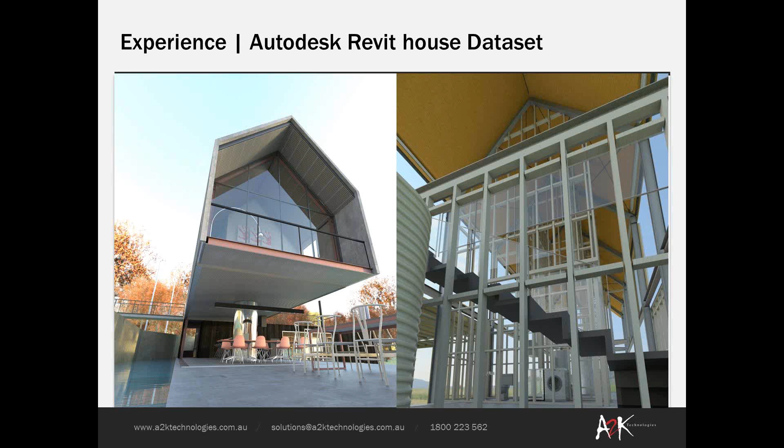Okay, I'm going to take us through the first couple of items on our agenda. We're going to look at Revit MEP, and then we'll have an overview of Navisworks and the ReCap tools in 2015. Let's get moving. New features in Revit MEP 2015.

Let's cover the main ones applicable to the MEP space specifically, beginning with pressure drop calculations, which have been improved and updated. They've added a couple of additional equations to calculate pressure drops in your ducts and pipes. Previously they had just one equation for turbulent flow.

They have now added the Haaland equation and the Colebrook equation, which are turbulent and transitional flow equations. So you have the opportunity to choose which equation, which calculation, you want to use, giving a bit more flexibility there. And as I mentioned, that's for both ducts and pipes.

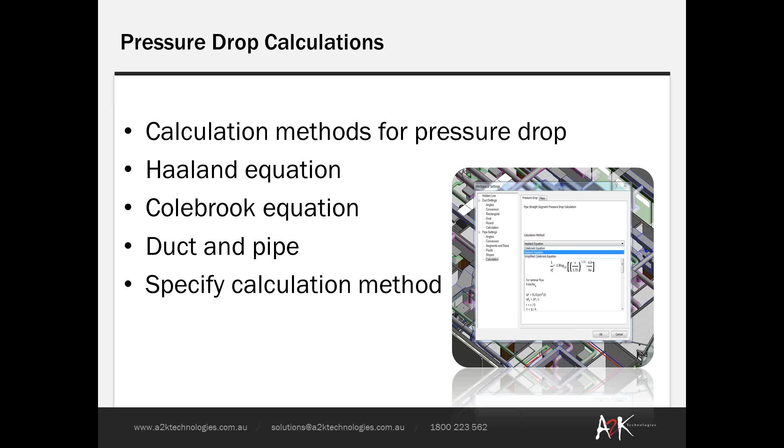The other major update in the mechanical space is the accurate display and documentation of airflows in your models — displaying accurate airflows before and after tapped ducts and pipes. Previously, prior to 2015, if you had pipes and ducts tapped off a main run, the tags would not show the airflow accurately in the system. But they've fixed that now so you can display those airflows accurately.

You could previously use the System Inspector tool, which would show you the airflows accurately in any branch of the duct or pipe. However, the tags themselves would only display the main flow, or wouldn't show a display of multiple values. So they've added that functionality so you've got more accuracy in tagging those features.

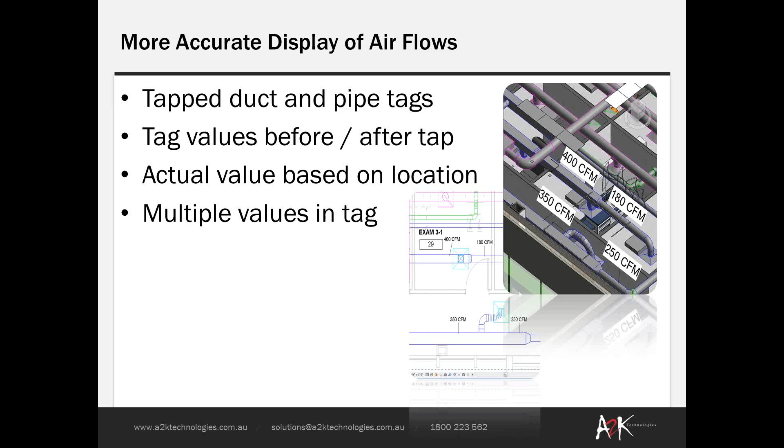On the API side of things, specific to MEP, they've opened up the API on the electrical side further now. So companies with the capability to tap into the API and do some programming now have more leeway on the electrical side of the API, specifically with wire shapes and being able to add and modify wire properties and remove vertices.

I guess it's encouraging to see them opening the API more and more, and specifically over the last few versions of Revit, they have been opening up the specific MEP disciplines, which has been quite encouraging.

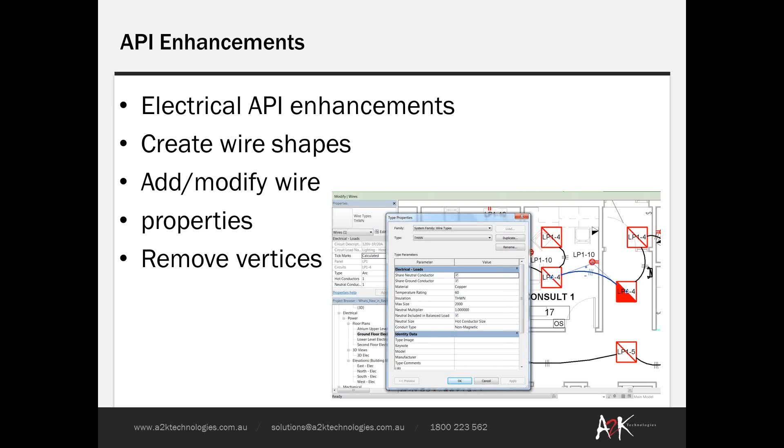Another new feature you'll experience in 2015 is how slope pipes work and connect. Previously there was a button that let you ignore the slope to connect, which could be a handy feature. They've updated that to add these new offset connection options — you can now choose whether to add a vertical step down when connecting a slope pipe into a main run, or use the equivalent of the old ignore-slope-to-connect button, now called the change slope button.

Some new features that are common across the Revit platform itself, I'll cover now. I think some of these are quite applicable to MEP and can be useful for documentation.

The first one is this new feature of being able to add images in schedules. They've added two parameters into Revit now: a type image parameter and an instance image parameter, which allow you to attach an image — a JPEG or bitmap file — to your family components. Then when you schedule those, when you create a schedule for a particular category in Revit, you'll have access to those parameters.

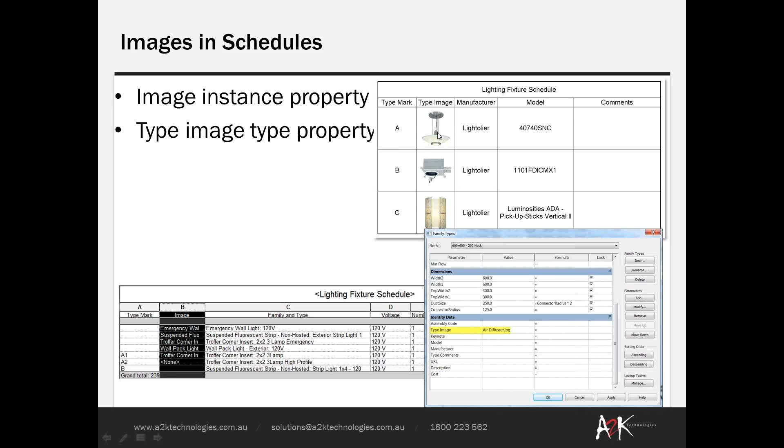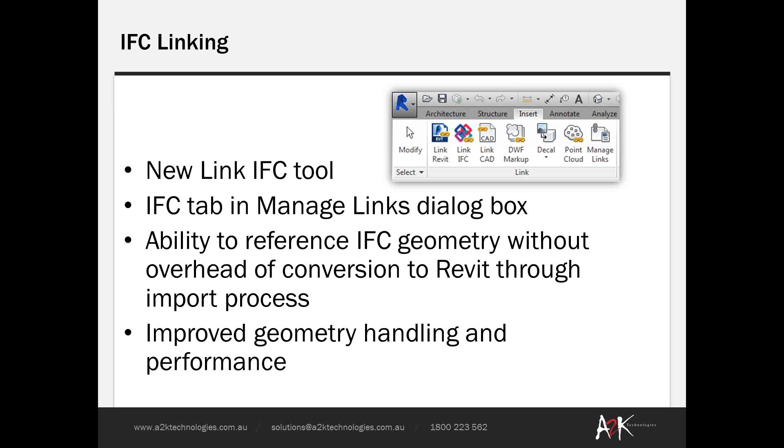Another new feature is the ability to link IFC files in. Previously, we could only import into Revit, which was a lengthy process and could come up with errors - I'm sure some of you have experienced it. Now you have the option to link IFC files in, much like linking any other Revit model, without the overhead of converting to native Revit geometry format. You'll have access to the IFC link tab in Manage Links, so you can control those links much like your Revit links - basically improved geometry handling for projects where you're working across different companies using different software.

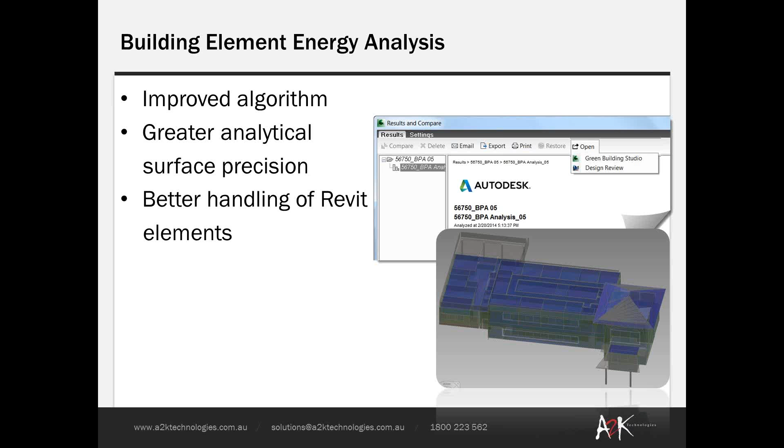On the building element energy analysis side, they've improved some of the algorithms Revit uses in the background to communicate with tools like Green Building Studio. There's greater analytical surface precision and better handling of these elements in Revit, giving you more accurate results when running things like energy analysis.

There are also improvements in overall performance and the back end of the program itself. I'll breeze through this since Samuel will touch on it in more detail when covering the architectural parts. Basically, there are faster drawing elements in views and faster selection graphics - the drawing calls Revit asks for when drawing components are reduced. Specific to MEP, they've enhanced the underlying way MEP components render on the fly, particularly in 3D views, so overall the program performs faster.

Okay, so let's now jump in and have a quick look at some features of Navisworks, and how you can use it for coordination and clash detection.

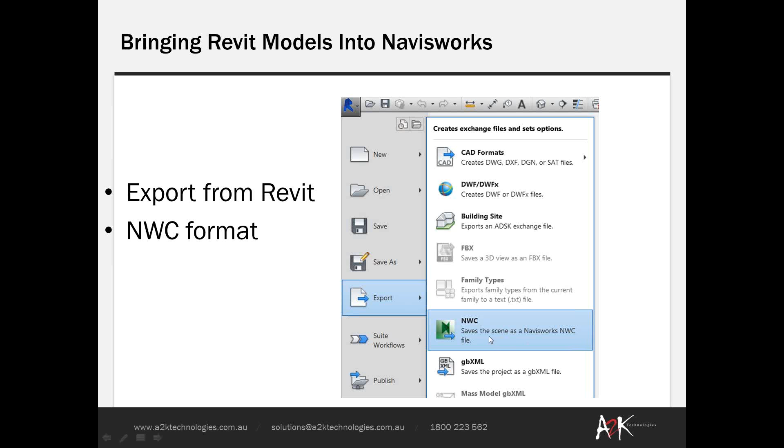In Navisworks, you can bring in models from multiple formats, one of them being Revit. In this first slide, I'm talking about exporting from Revit to the NWC format. It's important to note that Navisworks 2015 will read native Revit RVT files directly. However, in the next few slides I'll explain briefly why we think it's still useful, and the workflows are a bit better, if you export from Revit to the NWC format.

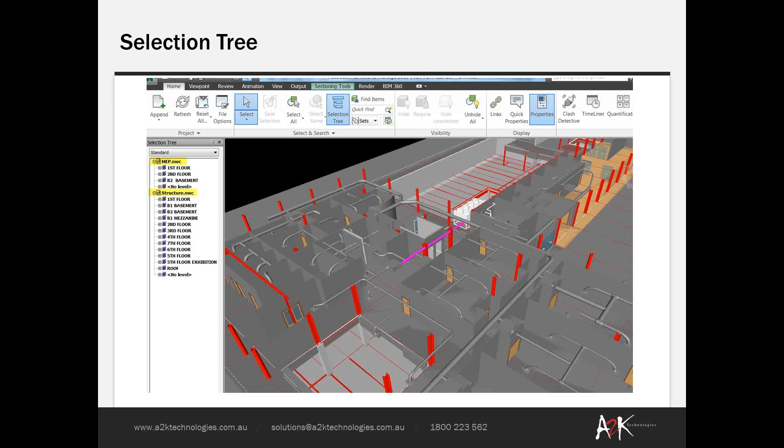When you append NWC files into your Navisworks file, once exported from your Revit model, they come in and you can see what's called the selection tree. Over here on the left-hand side, it breaks up the different models I've brought in - we've got an MEP and a structure NWC model. By exporting to the NWC format, you get a lot more flexibility and control through your selection tree and how you can drill into the different layers of geometry. It's also a much quicker file format to work with in Navisworks, and easier to manage, particularly if you've got a large data set.

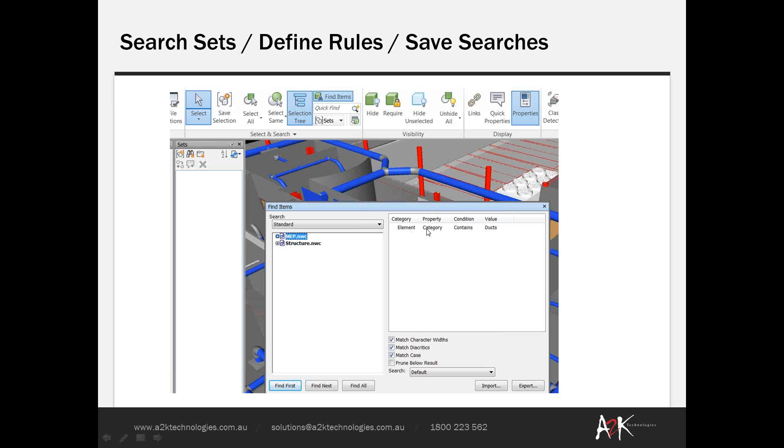Once I have set that search tool, I can actually save that search set so that I can use it later on, and I don't have to come back and run this search rule each and every time. I can save the search set, and if I go to the next screen, you can see that I've now saved that set and called it ducts.

So I can come back and call on that search set, and it'll select the ducts each and every time. The beauty of search sets is that even when you update your model, if ducts have been added or you add another level, this search set will continually update and keep finding all of those ducts in your model. So it's current and accurate, running that search pretty much every time you select that search set, getting every piece in the model.

So just a little bit about now the clash detective tool. This is in Navisworks Manage 2015.

Carrying on from those search sets, we can actually run these clash detection tools between particular elements in our Navisworks data set. In this example, as we saw with the MEP model and the structure model, I can set myself up a new clash test from the clash detective tool. I can call it, for example, duct versus steel, and then for my selection criteria, instead of just picking the model itself, I can drill into those search sets I've defined. So I've drilled into that duct search set I created, and I'll have that selected as my selection A column for my clash rule.

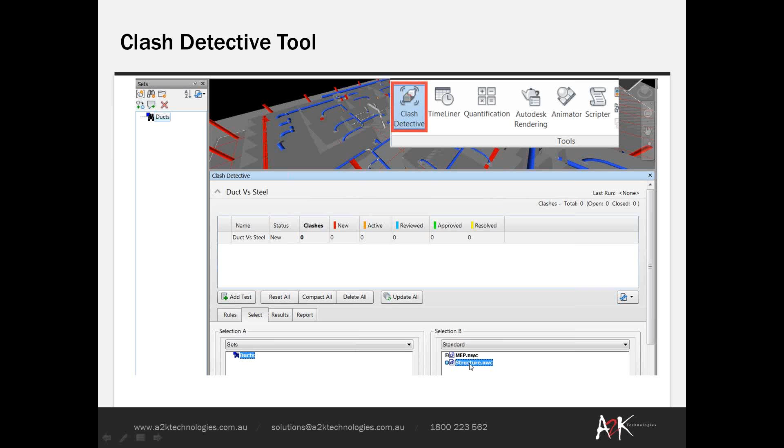And I want to clash that against, here on the right-hand side of my screen, against the structure. Once I've defined the selection criteria for my clash, we're now free to run the test, so we can click on the Run Test button.

Once we've run the test, we can see that we have a whole bunch of clashes that it's found, 25 clashes in this example, and we can run through those clashes, and Navisworks will highlight the elements applicable to each clash. This one here is labelled as just clash 14 at the moment. I have that selected, and you can see that it's highlighting that on the screen, giving us a preview.

You can alter and change the way these are visibly showing up in this clash detection tool, whether it's greying out the rest of the model, the background, other elements, and just highlighting what's clashing between your selection A and selection B columns, highlighting those green and red. So you do have some flexibility to change those visibilities.

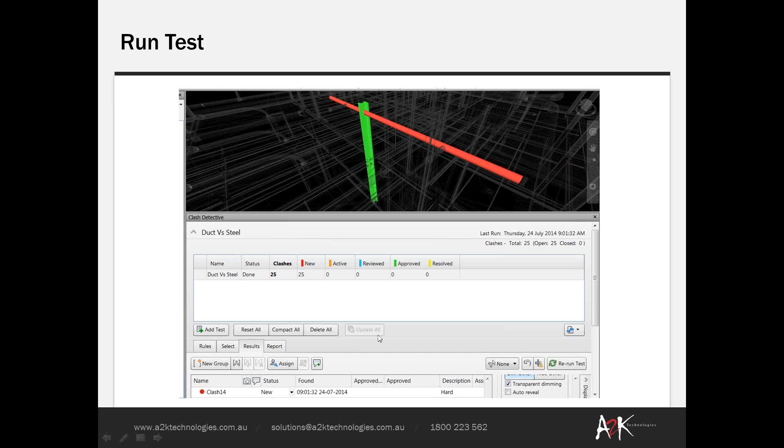On top of that, with your clash management, you can see that you've got options to assign your clashes to whether they're new, active, reviewed, or approved, and you can do that down here in the clash results portion of the clash detection tool. So we can assign those rules and assignments there.

Another nice feature of Navisworks is this switchback feature. We'll just touch on this quickly. What this allows you to do is select a piece of geometry or an element in Navisworks, and then you...

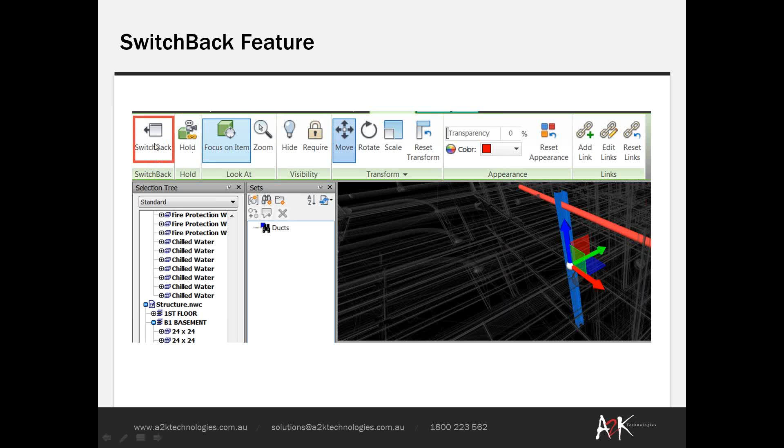click on the switchback button here, and this allows you, if you've got the same model that you've opened in Revit that you've exported into your Navisworks file, to click on your switchback button in Navisworks and it'll take you back to the authoring software, which in this case would be Revit. It will take you to a view and take you to that element in the view. So there's a bit of setup to get that working, but it does work quite well once you get it going, so it can be quite handy to take you back to the Revit model as need be.

You can report these clashes out of Navisworks. There's a few formats you can take out, HTML, XML as an example, and you've got a few options for what you actually want to export out, the summary, clash point, date found, etc., and which status of clashes you want to add in there: new, active, reviewed, or approved.

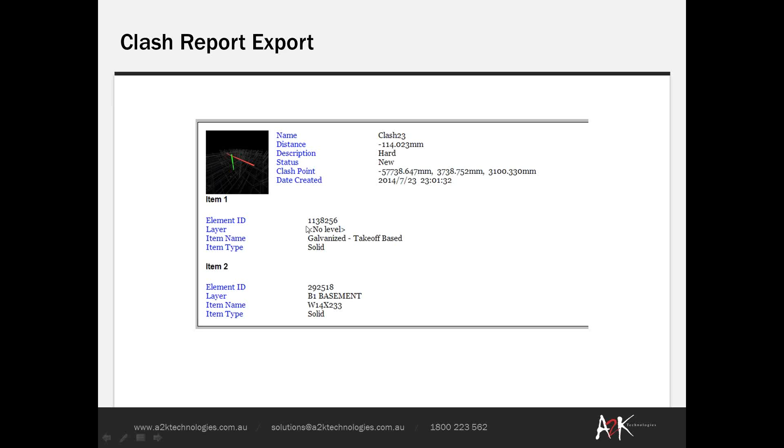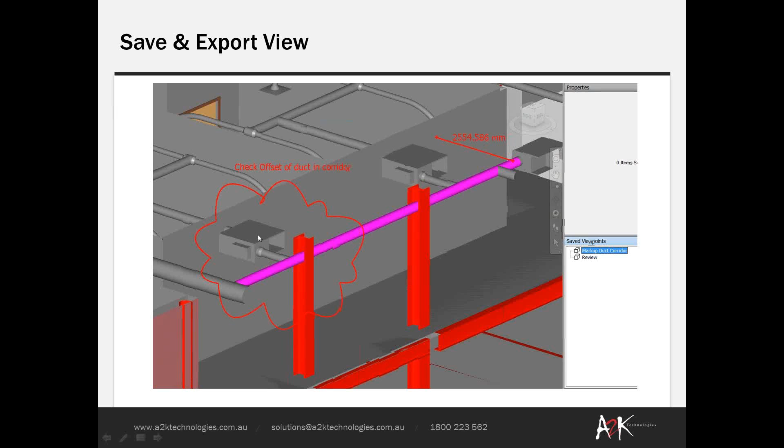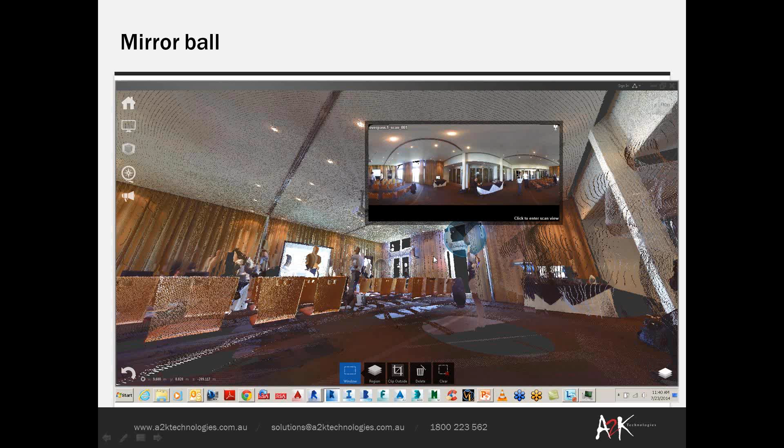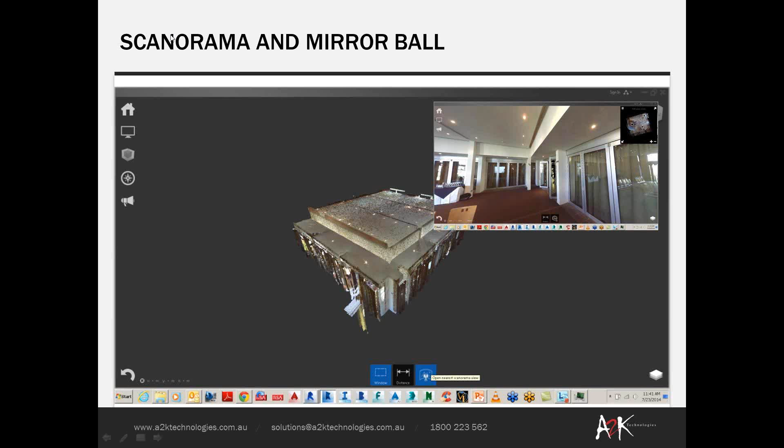The mirror ball feature in ReCap is enabled inside the scan, attached to the points within it. On the next screen, the Scanorama and mirror ball feature lets you click in and get a Scanorama effect, basically letting you navigate around your point cloud file.

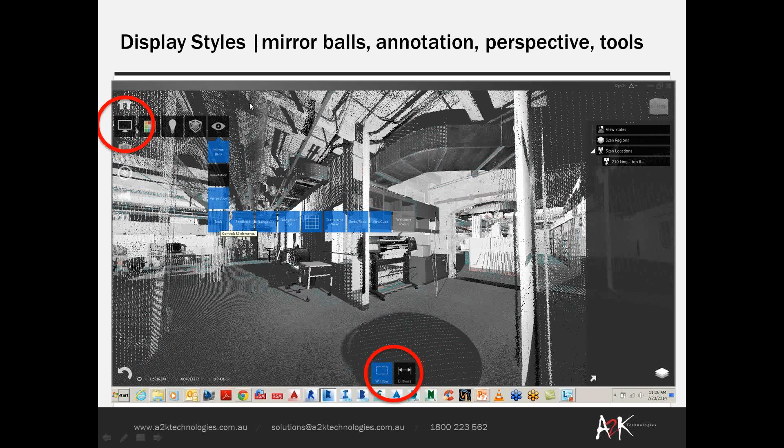So the imported scan result is basically what we're looking at here, this is what it looks like. Some other features include display styles with the mirror ball annotation and perspective tools. It's a really user-friendly interface, the buttons are quite accessible, and you've also got display options and options for distance as well.

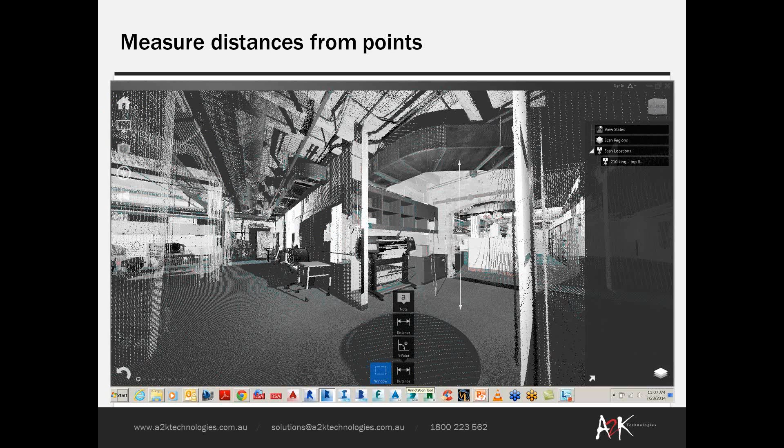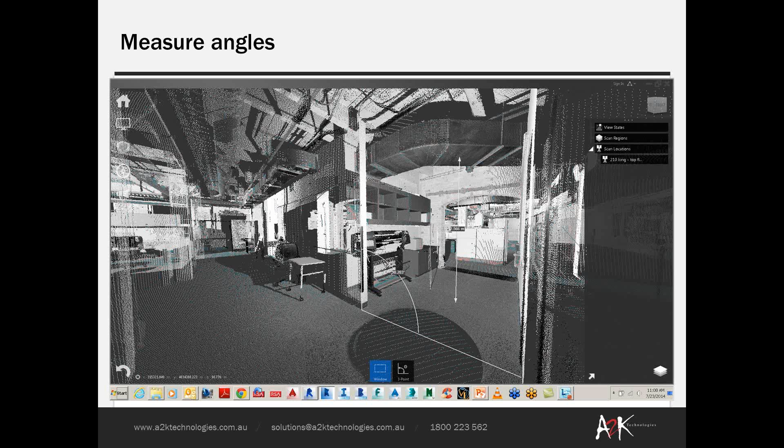Let's have a look at the next slide. Much like in Navisworks, we can measure and take distances off the point cloud file in ReCap, and there are a few other tools in there as well, we can also measure angles. The measurement tools work much the same as they feel in Navisworks, if you're used to that.

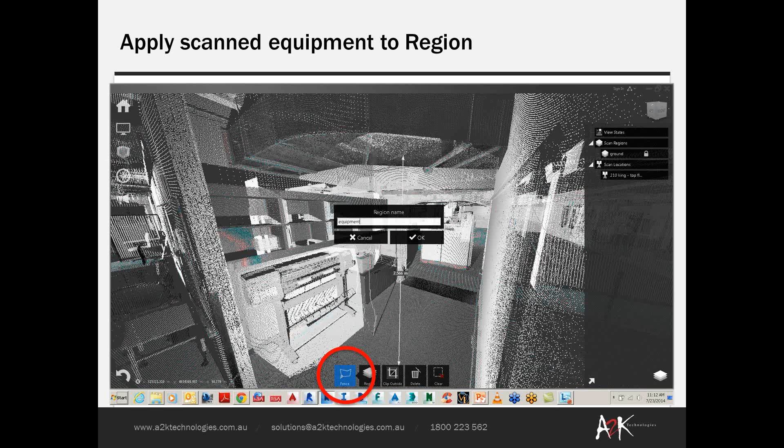On the next slide we can see an example of how we can apply regions, then create those regions to select and fence off certain geometry or points in the file. As an example, we've got some equipment being cut out, and you can see that you can actually remove elements of your point cloud file.

There's a limit box and a clip scan option in ReCap as well, which works much the same as a section box would in Revit, Navisworks, or other programs. You can crop and manipulate your point cloud file, as you can see on screen, and those clip and limit box features are available at the bottom of your screen.

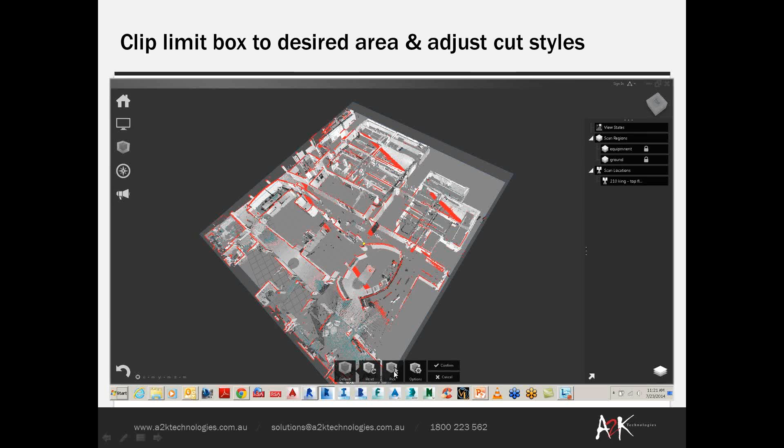Saving the file out of ReCap, the RCP is the ReCap file format. You can save out and use it in Revit, Navisworks, AutoCAD, and 3ds Max. Specifically, you can import your ReCap RCP files into Revit. As an example, you can link your point cloud files in and it will come through into your Revit file.

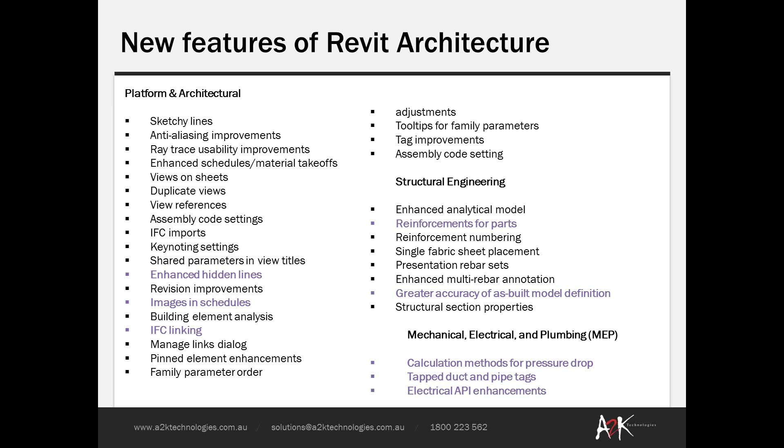So a bit of background, Revit has been around for a long time. Back in 1999, the vision for Revit was only ever thought of as being something for doing, say, a 5-story hospital. Then in 2002, Autodesk acquired the Revit technologies, and still the methodology was one person, one computer, and a $50 million building.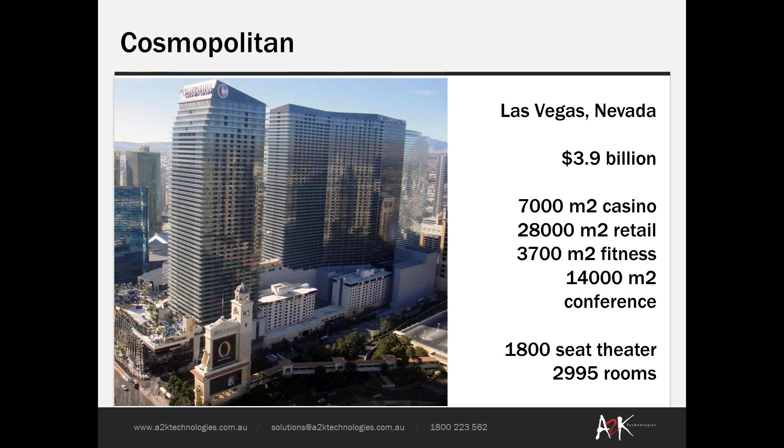Not everybody's going to need a fix for Russian translations and Navisworks quantification, so you can choose to ignore them, or you can install them as per what's needed for your project.

Let's start off with some of the tools for architects. One thing Brendan mentioned before is the new Revit 2015 platform is a lot faster - faster drawing of elements in views, faster selection graphics, and improved performance for MEP views. Our users compared 2014 to 2015 by running an API test for the demo dataset that ships with Revit. Opening up all the views of the model in 2014 took 45 seconds, whereas the same test in 2015 took 36 seconds - almost a 25% improvement when you migrate to 2015.

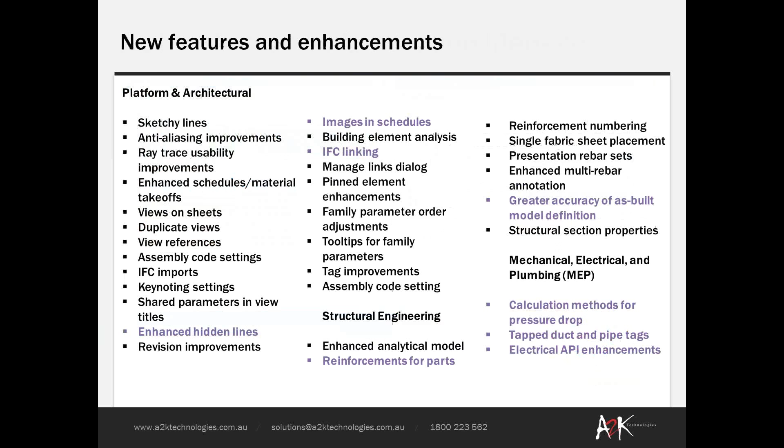A couple of other new tools for graphics is sketchy lines. Sometimes when presenting drawings to clients, we want to give it more of an artistic, sketchy look. You can go to the graphic display options in Revit 2015 and turn on Enable Sketchy Lines, then play around with the jitter and extension of those lines to get the graphical representation you want.

We also have platform enhancements with enhanced hidden lines. So if I'm working on a project with Brendan and want to see the mechanical or plumbing components transferring through my property, I can turn on these hidden lines and have greater control of them being displayed automatically to create more accurate and readable documentation.

Also, images in schedules are a really powerful application. Brendan mentioned this for electrical engineers doing lighting schedules - we can do this in the architectural space with furniture schedules too. We can bring in an image, whether a photograph, a rendering, or a screenshot of that family, place that parameter within your schedules, and bring out that information in the schedule table.

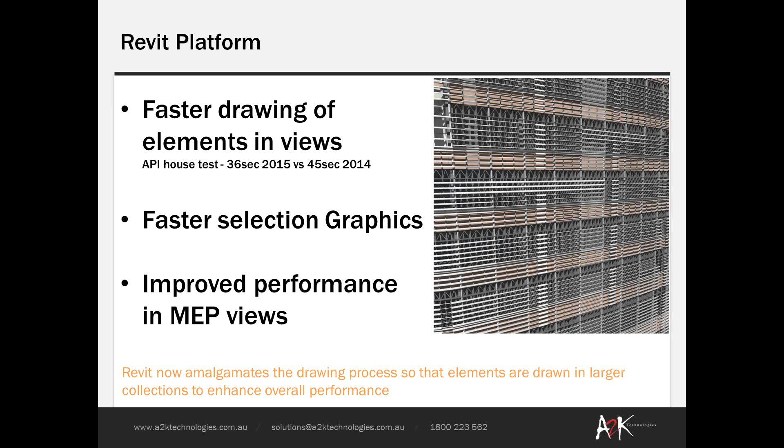One thing to note is that you need to place the schedule table on the sheet file for the graphical images to appear. So when you test this and you've got it within your model space, make sure you bring it into a sheet file, and then you'll be able to see those images that you've scheduled out.

Another great workflow to reduce the processing power on your computer is the IFC linking tool. I tested this with a dataset from bimobject - a heavy IFC file for another house with a lot of scaffolding. When we bring in this information via a linked IFC, it's a lot lighter, and I can select individual components within that linked IFC and bring up the embedded data in my properties palette on the left.

I want to mention the API. A lot's been going on with the application program interface since it started in 2005. We're using the API to develop Autodesk features like eTransmit, the new IFC link, and the family browser. So there's been a lot of growth with the API in the last 9 years.

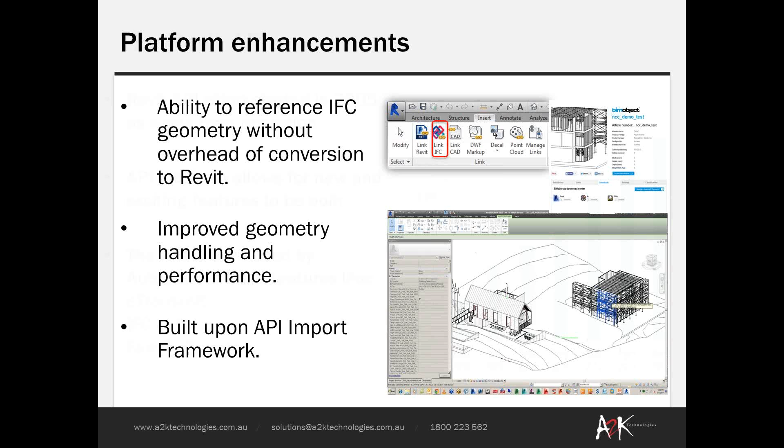Another great thing with the API, if you're on the full version of Revit, you can get access to all these different tools available on the Autodesk Revit Exchange Store. In the top right-hand corner of the majority of the applications is a little blue and white X, and that means the Exchange apps. You can click on that, and it will bring up all these different apps. A majority of them are free, or you can get them on a trial period, or for a small amount you can pay and download these apps to enhance your workflows.

This is just a screenshot of the page, so it will have a number of featured apps. There's bonus tools from Kiwi Codes, there's the level generator tool. A lot of these you see are free, or perhaps for tools like Power Measure, you may only pay $15 US. So you can get all these great apps to help you with your workflows, take out some of the repetitive workflows, and speed up production of your drawings.

One of the ones that I really like is the Casework and Interior Joinery tool. This will go through and make all the detail components and allow you to flex them with the design of your geometry and your system families in your model. So please go check this out.

You also get free ones with your subscription. Every year, if you're on subscription, you pay your annual subscription and you get your software upgrade. But you can also go to the subscription center and get extensions and apps as part of that payment to enhance your workflows. One of the ones you can see down the bottom right for MEP users is a space naming utility. You can download that extension, and it's all part of the subscription payment you make every year, so please go check that out.

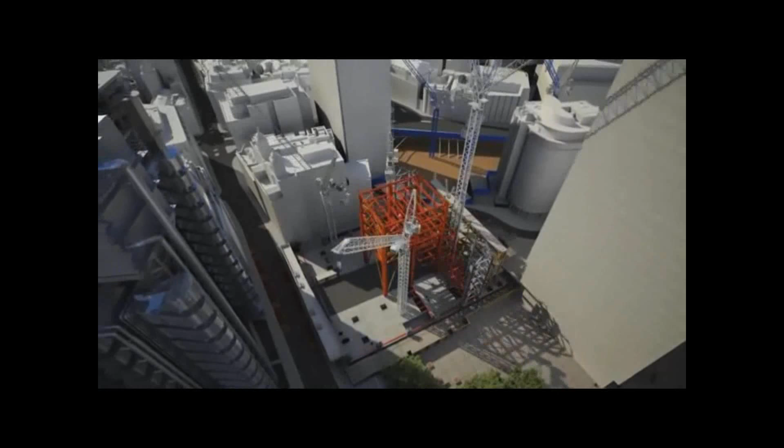What we're starting to see in Max is more and more people doing animations, and in the construction sector people want to produce construction animations. I want to try and play one now, which was produced by Laing O'Rourke. There is a slight bit of lag here because we're pushing it through Citrix, but this is a construction animation where Laing O'Rourke used the animation tools to produce a compelling sequence of installation and building components to win the bid to do the Leadenhall building in London.

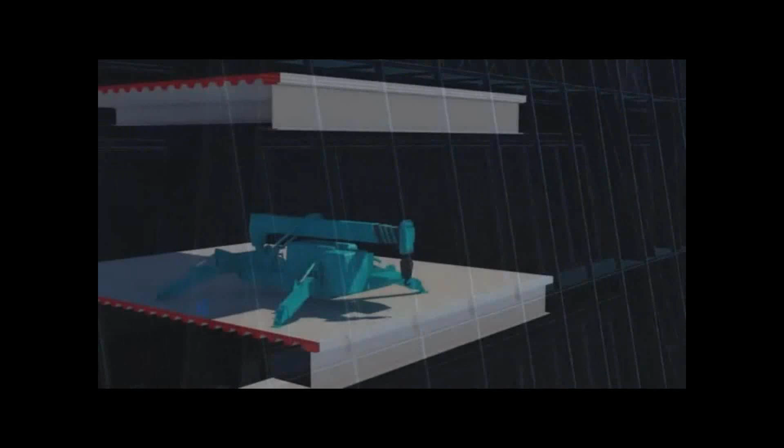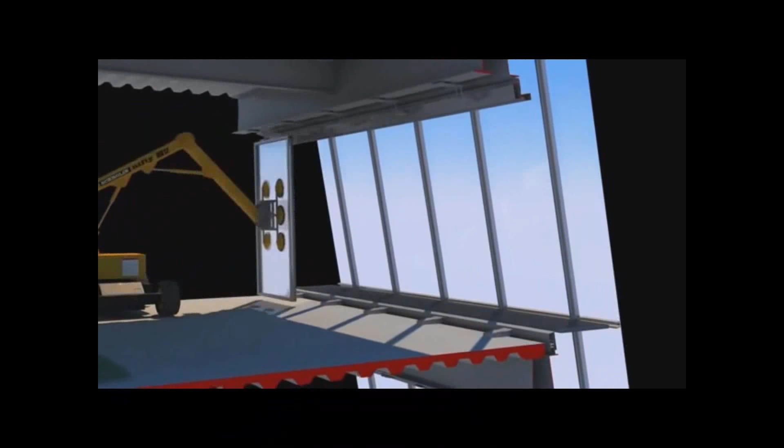If you haven't seen this project, it's a fantastic design, being dubbed the cheese grater. What they've done with this is get buy-in from the owners that they can build this building on budget and on time, knowing every single detail of every single component that's been installed, like the curtain walling and the double-skin facade. All of this has been worked out so that it will be built within its 36-month time period to complete, and that when the tenants take ownership of that building, they'll be able to move in on the right dates without delay. So it's a fantastic tool to communicate not just visualizations, but construction sequencing to a wide group of community stakeholders.

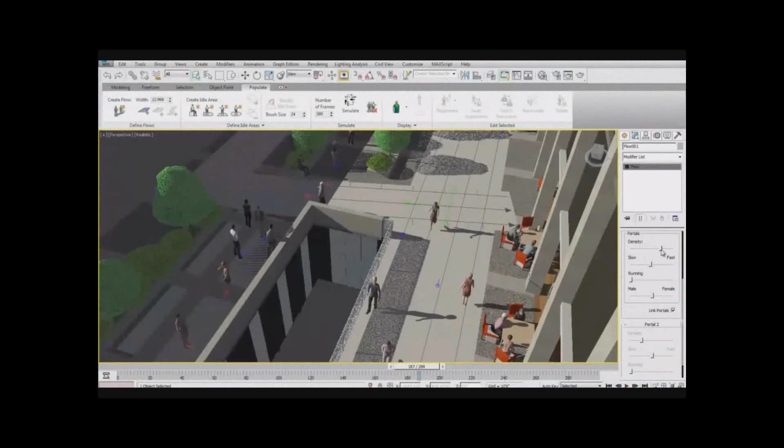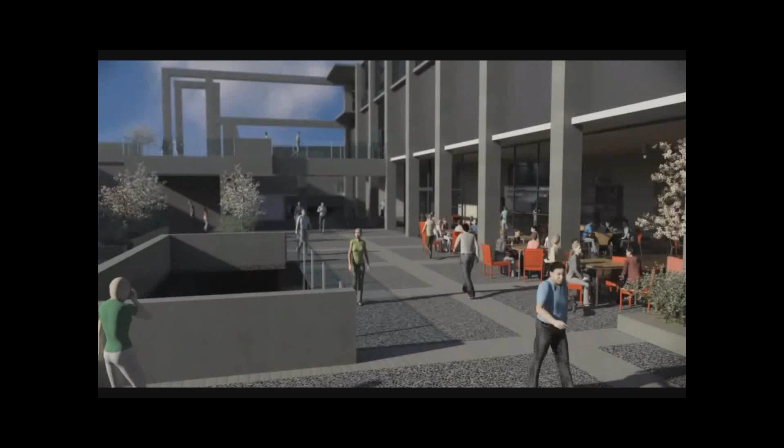Another great tool that was released in the 2014 version of 3ds Max Design was the Populate tool. New for 2015 is the ability to add more detailed meshes, have people sitting down and interacting with tables and chairs, and also adjust the texture mapping on the people. There's nothing to stop you from even texture mapping yourself into the building you're designing. This is a quick snapshot of an outdoor space populated with people interacting with that landscape design.

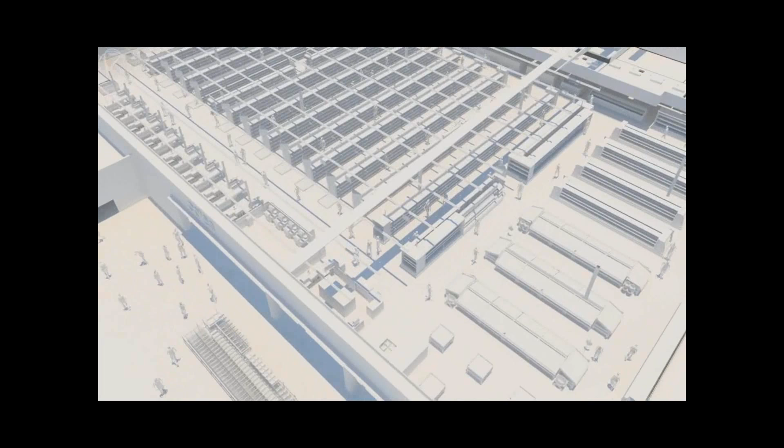Another thing you can do here - this is a basic Populate simulation that I put together a couple of years ago for a retail chain. I haven't done this to be a visualization. It's more to do with the logistics of people interacting with that design.

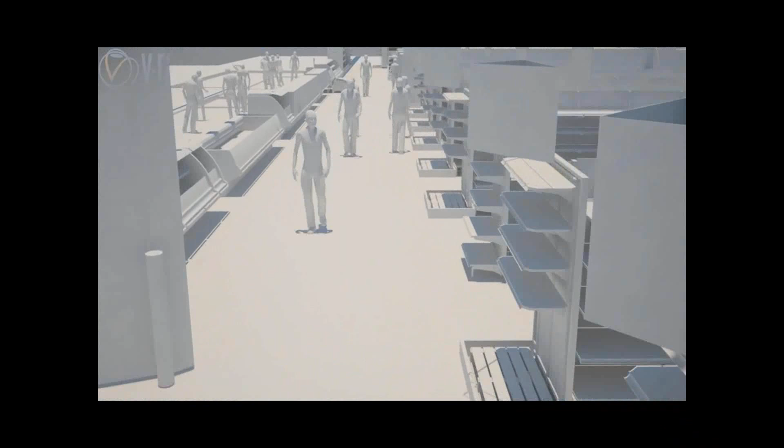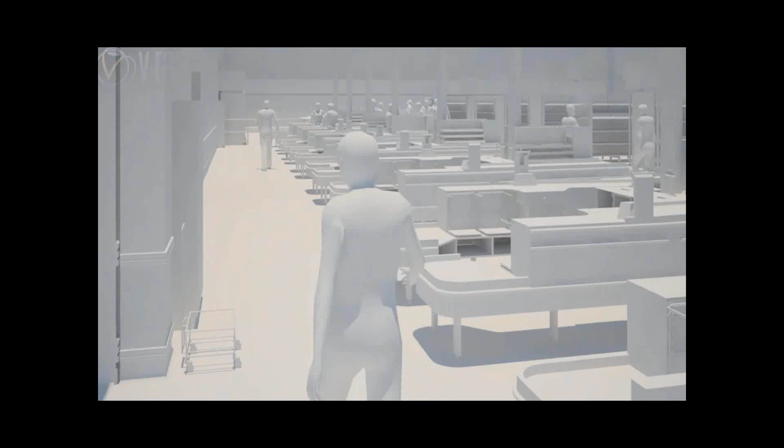What I've done is used the point and shoot command where I can set a starting point and an end point for where I want people to walk. I can create zones where I want them to stand and mingle, and look at how people walk down the aisles, where there may be clashing points or bottlenecks where people are queuing. We can use this tool not just for visualization, but to look at the logistics of people interacting with that space.

So you can see at the end here, where there's a queue by the checkout counter, there's going to be a bottleneck of people trying to get past.

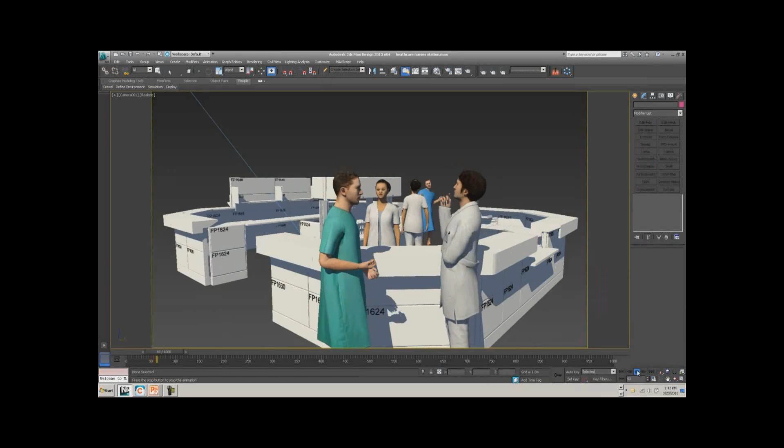If you want to go a little further with tools like this, especially in healthcare where customers are concerned with ergonomics or clinical planning of spaces, you can get third-party people. These are some medical characters obtained from a company called Rocketbox. What you can do is link your Revit geometry into 3ds Max Design, place the people in the scene, and have them interacting with it.

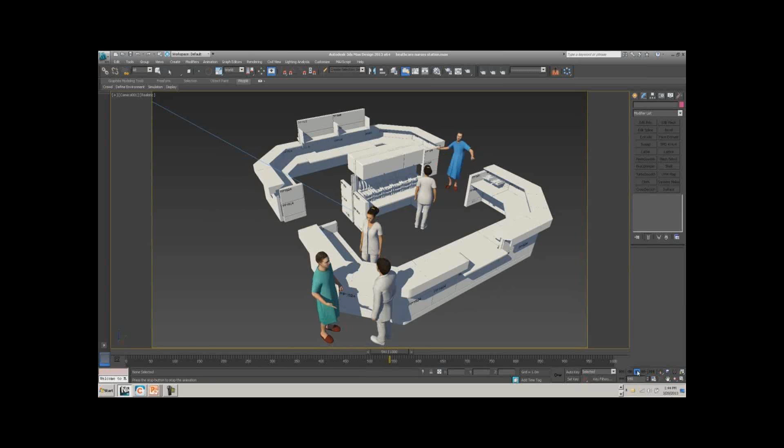This isn't a render, just a real-time screen capture. We've got one guy down the back of the scene dancing around - he's off his medication. But we can also show nurses, doctors, and patients interacting with our designs. We don't need to be a rendering expert or a Max expert - all I've done is linked the Revit model into Max, and I can run simulations showing how people interact with the ergonomics of that healthcare fit-out.

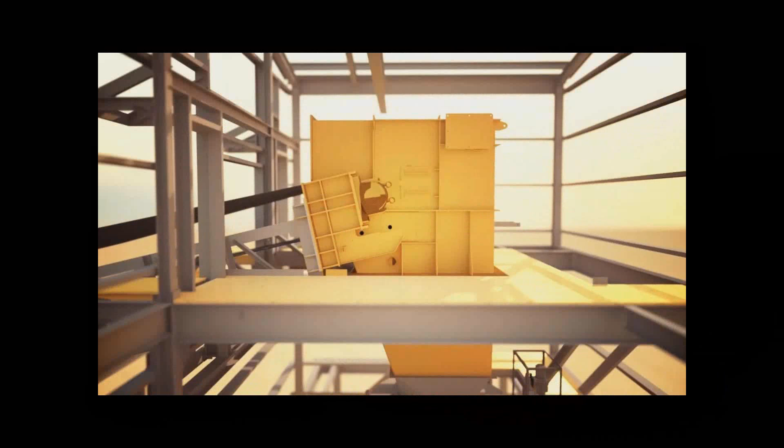If you want to go a little further, you can also link in AutoCAD data. This is an animation I did for a mining company a while back - it was a basic demo. What I'm doing here is using the iRay rendering engine to light my scene and create a bit of depth of field. This shot is kind of detailed.

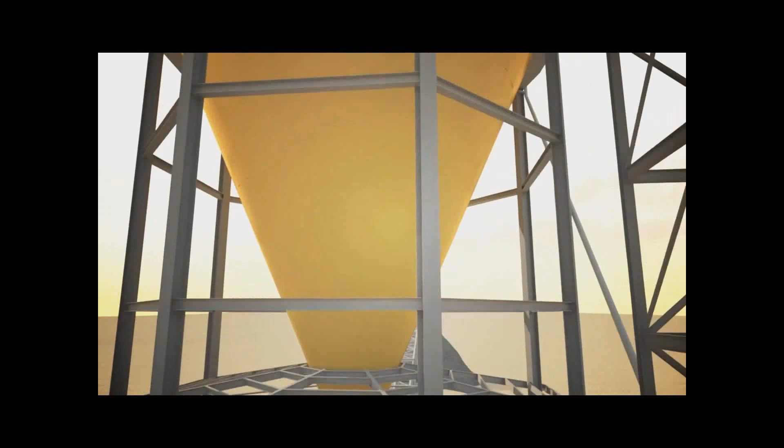It renders out at about 2 minutes a frame, but I'm able to run batch render animations that work while I sleep, and then stitch this together to get some quite nice output with not too much effort. So it's like linking Revit, AutoCAD, or other file formats like FBX into your scene, and you can get very compelling animations for marketing presentation purposes.

For those who want to go further with this tool, we have Autodesk Area, which is from our media and entertainment side of the business, and we have particle flow presets you can download for free. If you just Google this, you can go to the Autodesk Area website, and there are a number of presets which allow you to get started with more advanced animations.

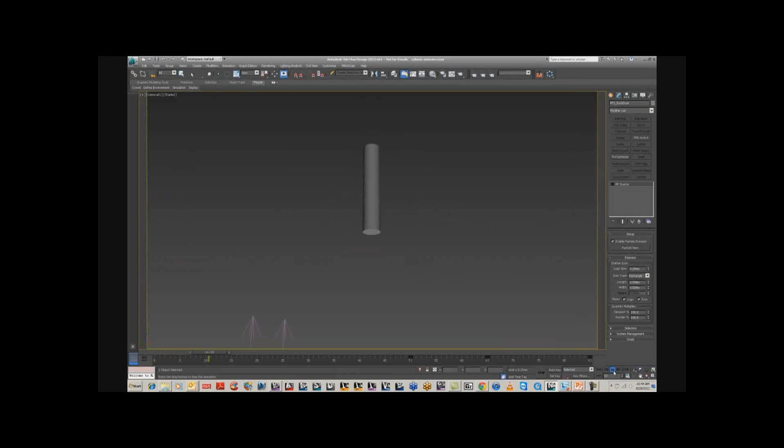This is an animation of a column hitting the ground, and we can even break apart the ground with this particle preset. I'm not an expert in this - I've just used the presets, loaded in my Revit geometry, and created this quick animation showing a column impacting the ground. Perhaps you might be doing a design with a water feature outside the front of your building. There are presets here for animated water - you just bring this into your scene, attach it to your Revit model, and hit play, and it will animate the water for you.

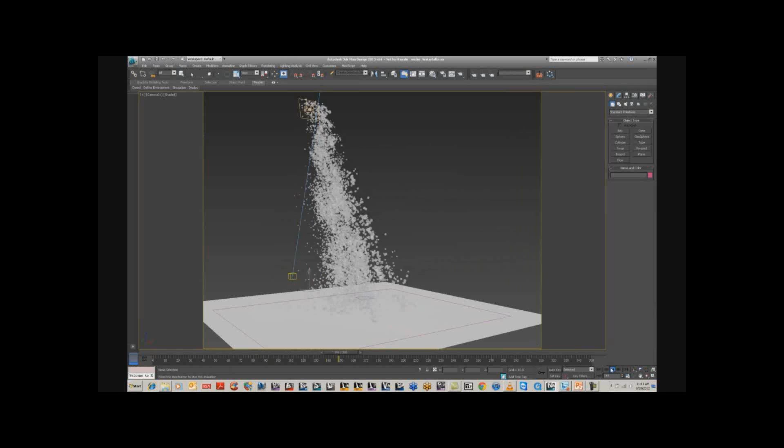You can also be poetic if you want to do something a little different, something that may stand out when you're competing for a job - animate some dandelions in a meadow. All you need to do now is place your building in that space. It'll be a very memorable presentation for your clients.

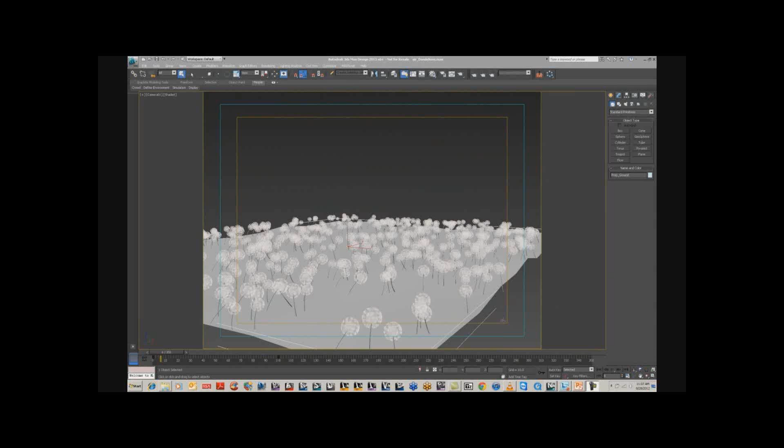Brendan mentioned Recap earlier. Recap works in AutoCAD, Revit, Navisworks, and also with 3ds Max Design. Perhaps you're doing an interior fit-out - you don't have to model up all the other information. You can link in RCP files into the 3ds Max Design environment and start working up your design with that laser scan as your backdrop.

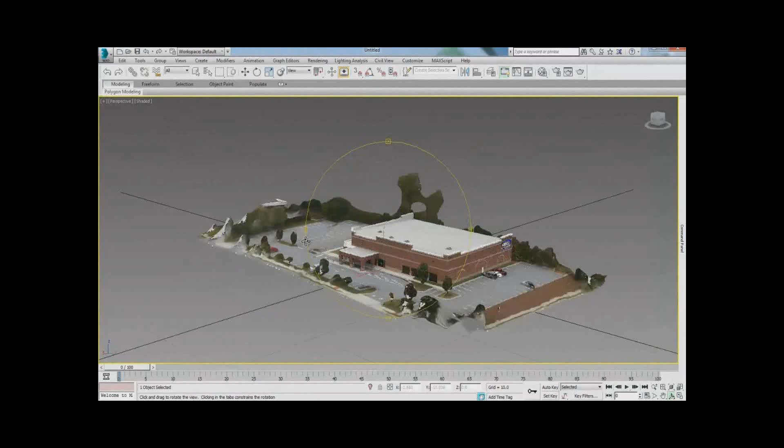So I've got the video here. A lot of the videos may have a bit of lag in them, but they are available to view on the Autodesk website. What we have here is another Recap scan, which was created with Recap Photo.

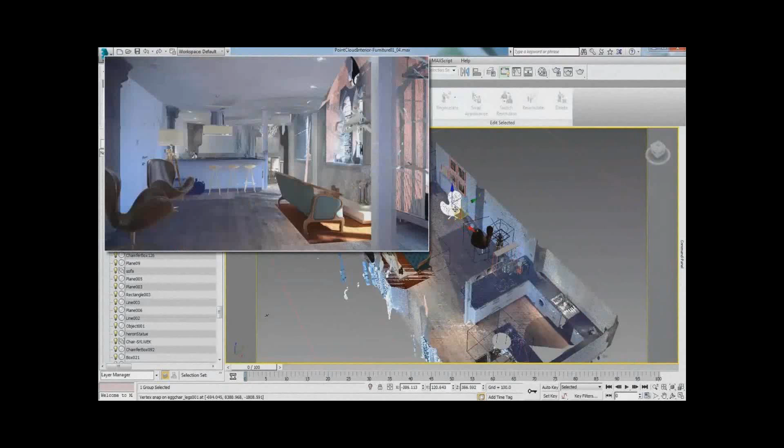So a drone was flown around this building. They take photographs and stitch them together on the cloud. Recap Photo is outside of the suite, I just need to make that point. So what we've done here is create a laser scan capture and a photo recap scan capture, and we're able to stitch these together. So this is the interior scene that's been shown.

There was a little bit of a lag, I do apologize — please check this out on our website. But you can actually bring all this data in. So if you're doing a building in the city and you've got a tower next door, you can bring in a photo recap scan, and that will cast shadows on your design proposal. So it's one application for planning that Recap can be applicable to.

Another great site to check out if you're new to Max and want to learn or use sample files: go to the Autodesk Knowledge Network and look for the 3ds Max download. There's a very large sample file set you can download, all preset for interiors — people, characters, sun path animations, even cities you can download for free to help get you started.

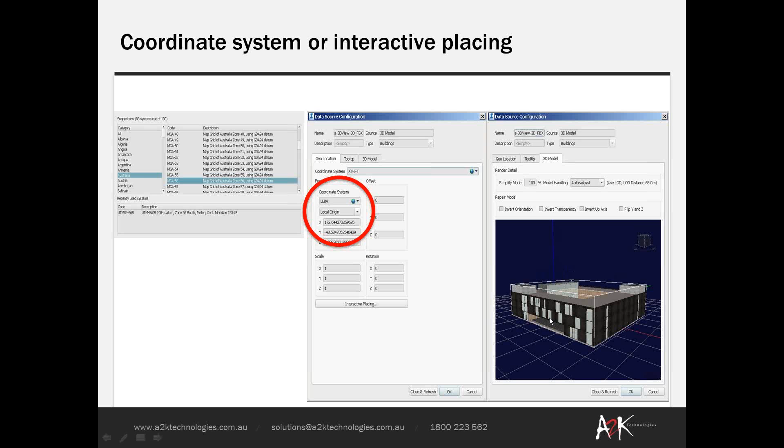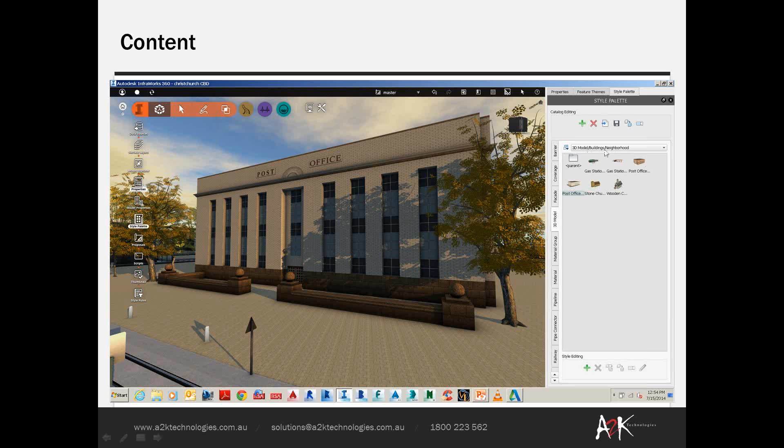Another great tool is the ability to create roads and rails. So I wanted to create a light rail in this instance, and the light rails can be customized with objects. I can put in a rail car, I can put in the rail style, so whether it's embedded in the road or whether it's above the road. I can also start to embed, say, bollards or curbs, so I can put in people and cyclists. In this case, I've got a few street signs, and I've set up a few rules here to put in different types of spacing.

You can also bring in a number of different file types. In this case, this is a DAE file, similar to FBX, which holds the geometry and the textures. So you can go to the 3D warehouse online - this is exactly what I did to start building up my city. I found that a user here has created a 3D model of the Christchurch Cathedral. I can download that, convert it in 3ds Max Design to a DAE file or an FBX file, and that's going to hold the textures that came from that 3D warehouse model.

And I can replace this default model, which we get from the model builder content - it gives me a basic footprint and a basic style of what the cathedral could be. Obviously, that's not what the cathedral is; it's a much more detailed Gothic design. But I can replace that with the one that I got from the 3D warehouse. So it's very easy to start gathering lightweight data from online and placing it, building up the city in more detail should you choose to do so.

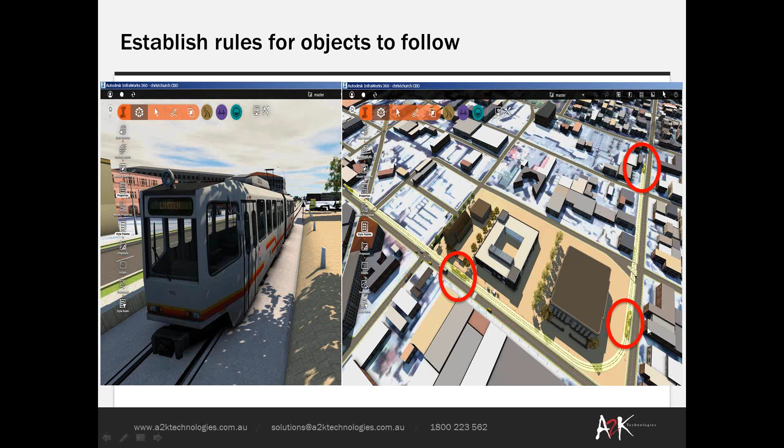What we can do here is bring up the storyboard tool, and we can quickly create animations by choosing some of the default animation workflows. In this case, I want to do an animation where it starts at the top, spins around the building, and goes down to a lower level.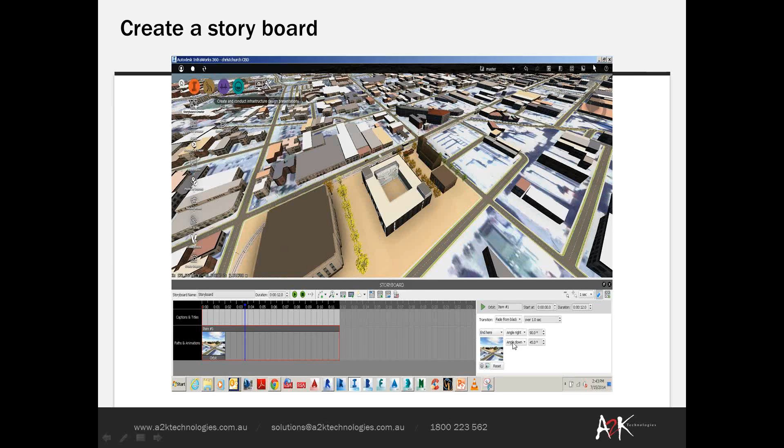So the one that was showing was the one that pans around the building. But for the next scene, I may want to do, say, a camera path type animation. Again, it's very simple to use — I can just record a couple of keyframes.

A starting point, maybe a middle point, and an end point. I can add that to my storyboard animation, and the camera will fly around the building, giving me a very quick animation.

We can also do text overlays. If you want to be a bit more clear with street names or building names, we can add the street names. In this case, I put in a street name and added that as an overlay to the captions and titles part of my storyboard capture, as you can see there.

We can quickly start to build up a story should we be presenting a design proposal to a developer, to a client, to a council, or to a community, clearly communicating what street or where we are in that design by adding this text caption overlay.

Also, we can add the sun path animation, doing a sunrise to sunset animation, looking at all those shadows, whether during winter or summer times, and how the shadows are going to cast within your design or on neighbouring buildings. There are all these really powerful tools you can add into your storyboard to produce compelling animations for presentation purposes.

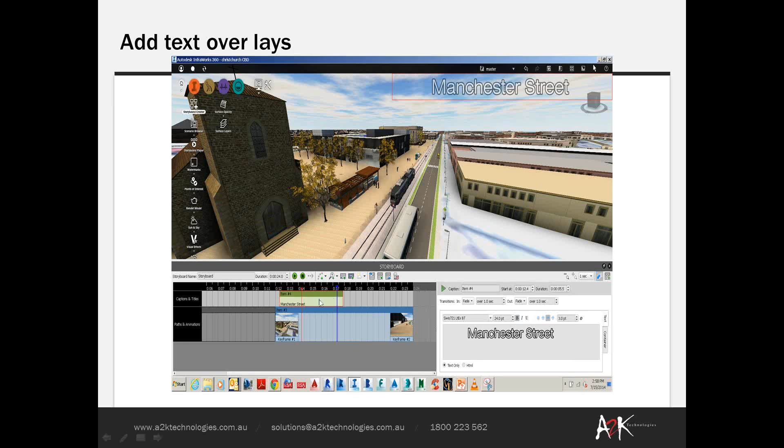Okay, finally I just want to drop back into 3ds Max Design because there is a workflow between Max and Infraworks. Across all the Autodesk applications, there are great interoperability tools which allow you to move between different platforms. Some of the things you do here in Max as well is your sun path animation.

You can link your models in and reposition them in any part of the world with longitude and latitude coordinates. We can run these animations, and we can run people through our models.

I'll just skip over some of this. These are just screenshots of how easy it is to draw a line from point A to point B, hit the Simulate tab, and the people are ready to go. You can have them standing in idle areas, or sitting down now in the 2015 application.

And then the workflow, if I wanted to bring Infraworks data back into Max, perhaps I want to use some of the great data sets that come with Infraworks, like this train data set. I can go into Infraworks and export an FBX, and it doesn't have to be the entire model. I can use this tool where I can create a box around the object, as opposed to the entire model, and just export that selected information out from Infraworks and then import it into Max.

So that train, I didn't want to remake that. I bring it back into Max, and I can add that to my scene where I've got my animated people. And then I can create in Max an animated train. We've got some really powerful tools where you can draw a spline from point A to point B, attach that train to the spline using path constraints, and then that train will automatically follow that line.

So now we go a little bit further. Instead of having just a camera flying around the building, flying around static objects, we can have a camera flying around a moving train, moving people, moving objects within our scene using some of these workflows. There's a great tool within Max where you can do keyframe animation and sync your camera, your sun path, your people, and your train animation to create a more compelling, more photorealistic presentation for all the people you need to present to.

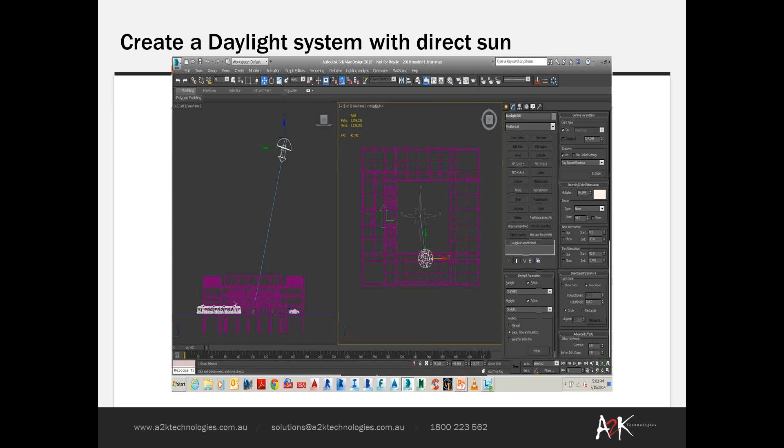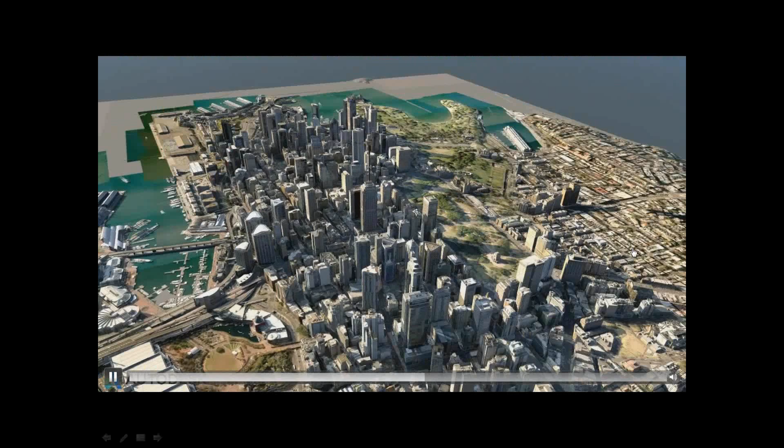So finally, I want to finish up with a more polished output from Infraworks 360. This was done by our specialist at Autodesk, Brett Casson. He has used these same principles that I've just shown to build the entire city of Sydney. This is the quality you can get exporting an animation and producing it for a client presentation using some of the principles of scanning models, bringing in DAE files, FBX files, Revit files, and the results you're going to get when you come to produce large-scale models like entire cities. This is just one of the cities that Brett's done. He's also done Tokyo and Melbourne, where he has 5,000 buildings sitting within Infraworks for presentations.

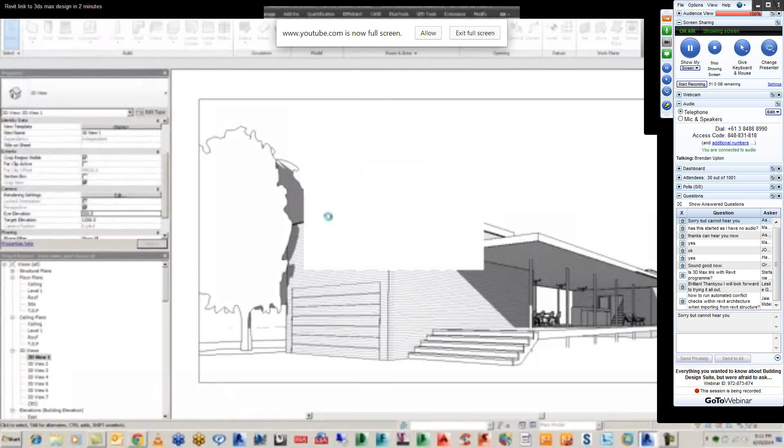Go down a little bit to the Revit link to 3ds Max Design in 2 minutes video. Click on this link and it will show a basic demo house. It's lagging a little because of bandwidth since we're running Citrix and Max, but it will show you how to export it out, bring it into Max, set up some basic cameras and lighting, and then run out a render.

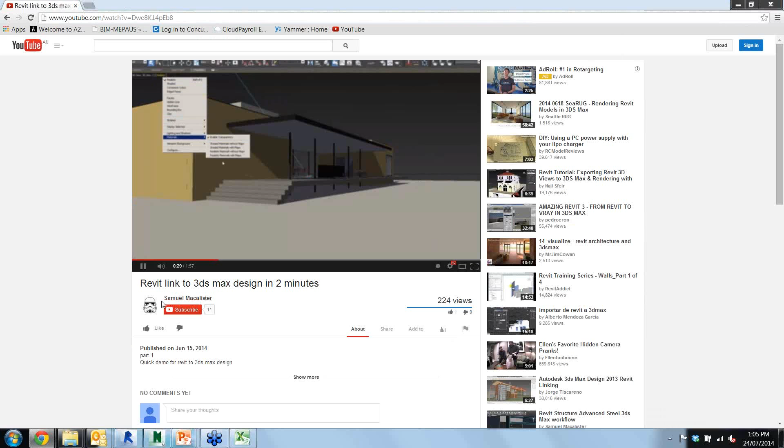I won't run through all this, we're just going to get back to the questions. Please check out this workflow on my YouTube channel under my name, Samuel Macalister. Next question is probably a Navisworks question - I'll hand back over to Brendan.

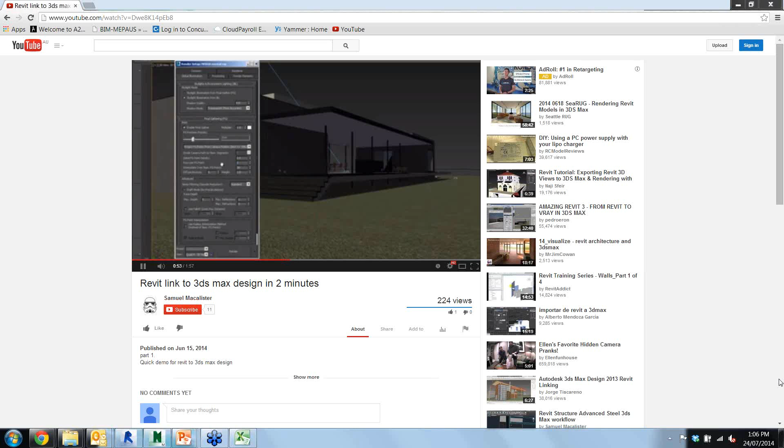How to run automated conflict checks within Revit architecture when importing from Revit structure. If I'm understanding that question correctly, I imagine you probably want to use a tool called the interference check within Revit.

If you want to be doing clashes just within Revit, not using a Navisworks clash tool, there is a tool in Revit called interference check. Let's show you that quickly - we'll jump into Revit. On the Collaborate tab here, you can see that you've got an interference check tool.

This is the clash detection tool that I briefly took us all through in Navisworks. There is somewhat of a clash detection tool available inside Revit itself, however it's not as powerful. You can't really create the rules that you can in Navis, and you can't control it. However, it works much the same way in terms of having two lists, and you can pick from either side to clash between particular categories.

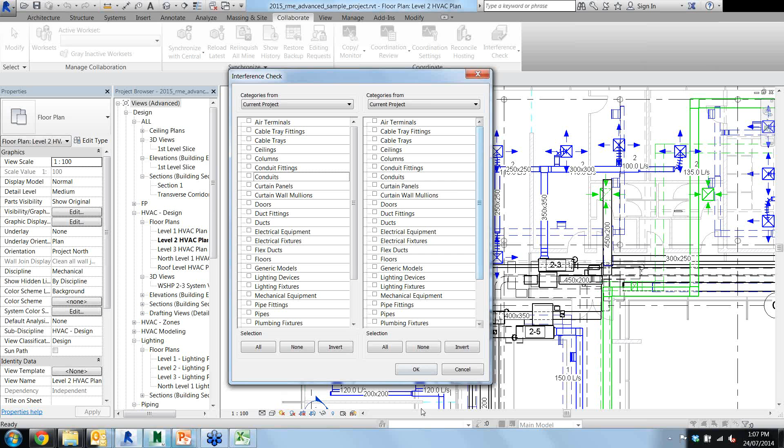You can also report those clashes out - there's functionality to report those out, similar to how we were doing it in Navisworks. However, it's important to note that the clash detection tools in Navisworks are much more powerful than the Revit tools, simply because you can apply rules, add your search sets, and manage your clashes a lot easier, particularly for BIM coordination.

And to add to that, Navisworks reads about 56 different file formats. In an ideal world we'd love for everybody to use Autodesk software, but that's not the reality. So instead of linking different file formats into Revit, Navisworks will bring in pretty much any file format as a very lightweight model. With a heavily serviced building, bringing all that data into Revit could slow it down, whereas Navisworks has a very lightweight viewer, so you can bring in complex information from any file format and run clash detection easily, getting great results.

So Interference Check will do the job, but it does have limitations. Navisworks Manage is the tool that will allow you to do more complex interference checking or clash detection, and exporting those files to the NWC format like we were describing - it will be much quicker in the Navisworks environment with those formats in place.

Looks like there's not many other questions coming through, so that's a good sign. Hopefully everybody's happy.

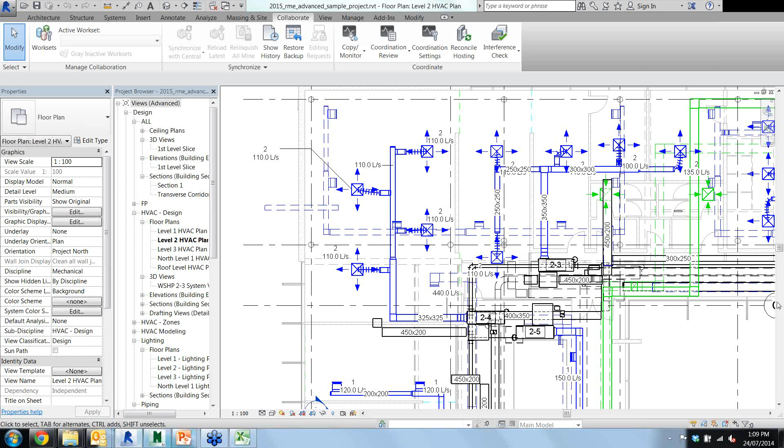So we go back to the PowerPoint.